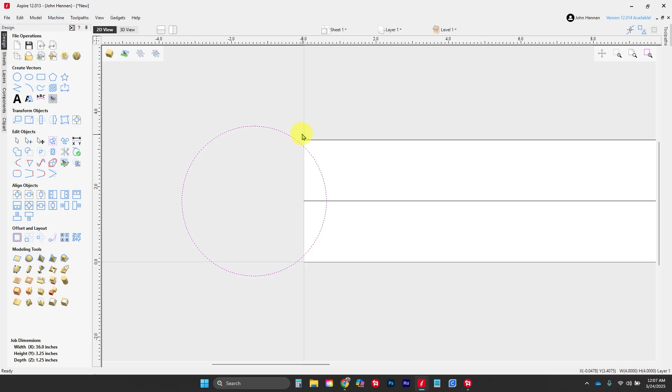It gives me a little extra room here for my reeds, and I'll show you where that's going to come into play. Second thing we do is just trim it off. So I'm going to use a polyline and grab my scissors tool and cut that off. Now I can delete my polyline. Grabbing this arc here, I'm going to go ahead and center it, and then using the 9 button on my keyboard, I'm going to rotate it flat and then just move it up here above.

The next thing I have to decide is the reeds, and what I like to do here is use the tool called Copy Along Vectors, and I'm going to set a 3/8 inch diameter circle with a distance between copies of 3/8 of an inch as well. And I am going to force even spacing. This is going to make sure they have a nice, clean, even set of arcs. So let's go ahead and copy that.

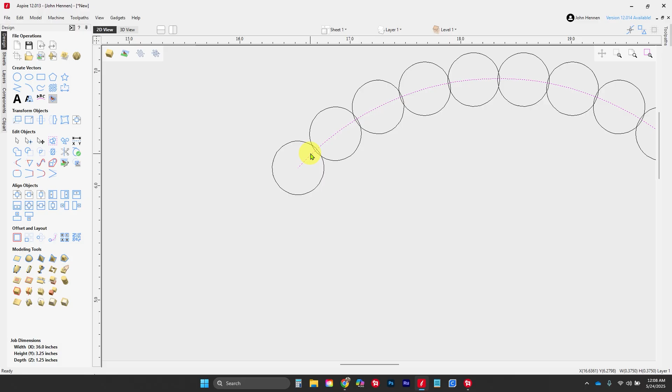And we're going to notice in here that we're just slightly overlapped, and that is a good thing. I'm going to show you why as we move this up and out of the way, again, just using the arrow keys on our keyboard. Let's move that up here, out of the way, and let's draw a polyline from the center of this circle right here, all the way over across this one here.

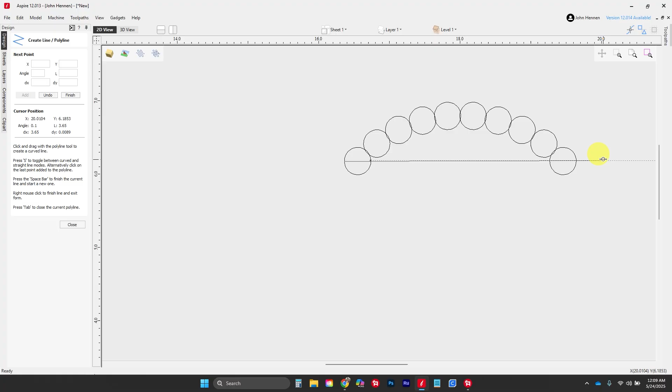And I want to make sure that my A stays at exactly 0 there. I don't want it to come up. Notice here it climbed, so let's delete that one off, and let's do that one again. Snap to the center, and come over here at an A0. Don't care how long it goes because that's all going away anyway.

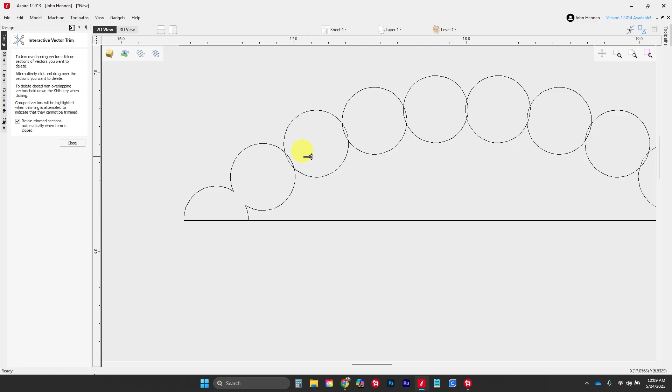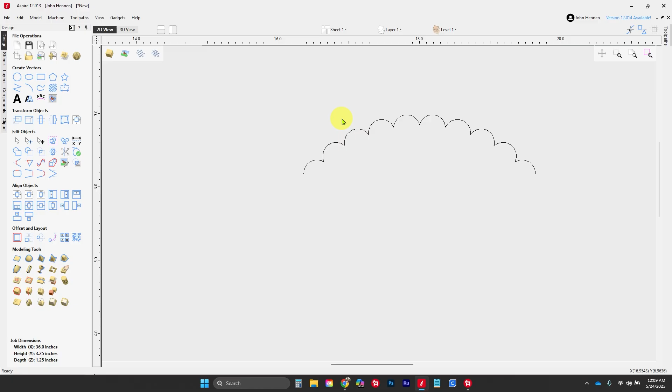We're going to take our scissors, cut out the center section, cut out the bottom of our circle here, and let's just separate the top from the bottom. Scissors tool is one of my favorite tools in Aspire. Really makes trimming everything nice and easy. Now we'll take this one over in node mode and delete this bottom section here, and also delete the bottom of our arc. Now here is our reeded surface, so let's go ahead and take a look at that and see what it looks like when we make it.

So we're going to use our vertical split screen that's up here. It's going to allow us to see the 2D and the 3D. We're going to select our center line. We're going to use the extrude tool. Now this tool is a great tool. We're just going to center the shape over the top of that line. Click on that there, and we're just going to hit apply.

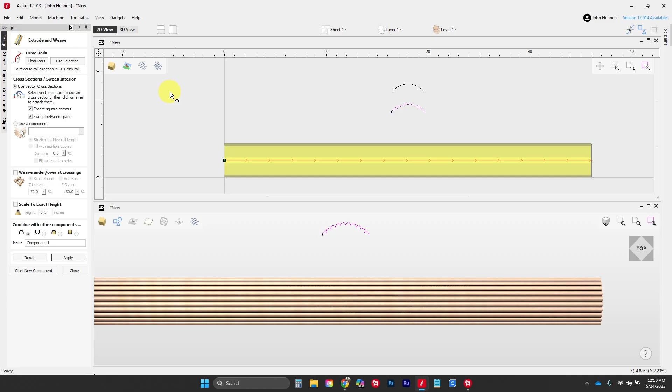Notice here it goes all the way out to the end. That's why we left that extra space there. Let's look at the end of our part here. It looks beautiful. We have a phenomenal set of reeds coming up here. Just exactly what we're looking for. So love it. I'm going to change that to a merge.

Hit close. And then I'm going to go ahead and just turn that off for a moment, because now comes the exciting part. We have to figure out how to build the ribbons. So let's go back to our Handbook of Ornament and look at these. Now the lower ribbon, or the underneath ribbon, goes from the upper left to the bottom right. And the ribbon that is on top goes from the lower left to the upper right.

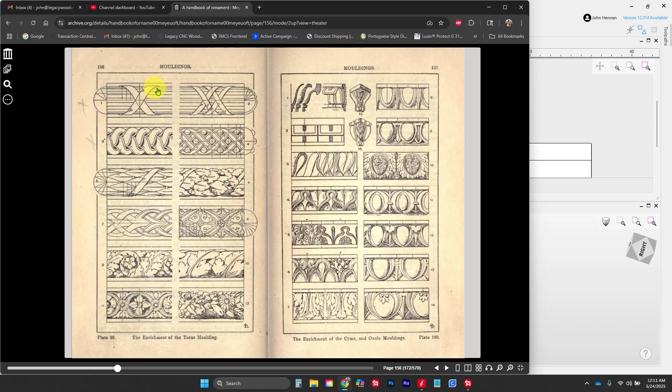Let's go ahead and just lay that out. We're going to first put in some parameters for it. We're just going to draw a rectangle and make sure that we just draw the exact height, and wherever it sits doesn't matter, because we're going to use our centering tool to put it dead center. All right, let's go ahead and just show our 2D view for a moment.

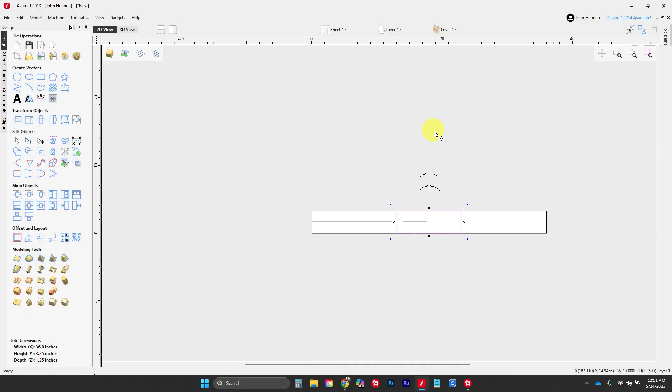And we're going to draw now a line that's going to come down at a 45-degree angle. So we're at 45. Go ahead and center that. And to make this thing just right, I'm going to use my offset tool. And I'm going to go both directions, 1/4 inch, and I'm going to delete my center vector. So now we're going to have a ribbon that is 1/2 inch wide.

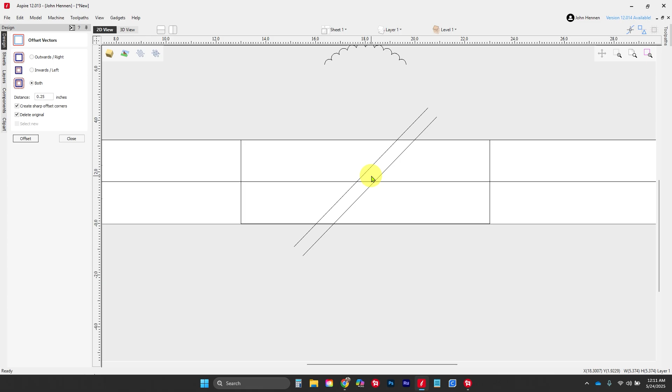I'm going to use my scissors tool one more time because it is my favorite tool. And we're just going to clean off all the excess here, just building ourselves a really cool parallelogram. From here, we're going to go to our node mode, and I'm going to hit B to Bezier, both of those. Now the trick is just to grab these upper 2 arms here. We're going to count as we move it. Use my arrow keys again.

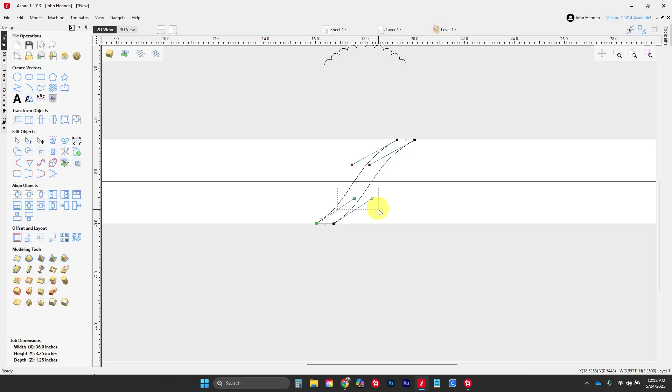Okay, and I'm going to grab the lower 2, going the opposite direction. And we start to have the shape that we're looking for. I'm going to go a little bit more than that one. And the same the other direction. Now we're starting to look great. One thing I do notice is up here is a little thinner than down here.

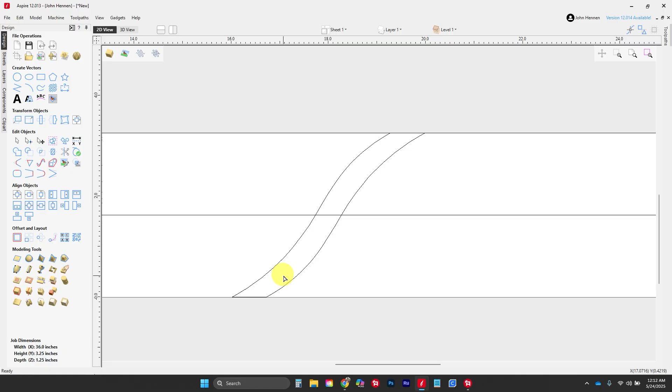So I'm going to right click and go to insert midpoint and right click and insert midpoint. And I'm going to go 3 in, 1, 2, 3, and 3 in, 1, 2, 3. Now what I have is a ribbon that's more of the same size for the entire piece. Really excited. I like the shape of this one, so that's going to be the shape of our ribbon.

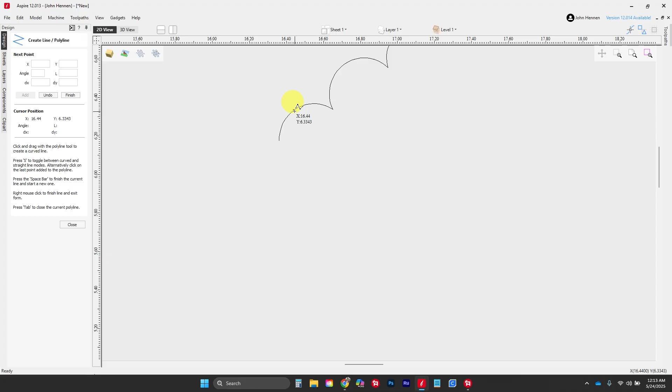The second thing we have to do is lay out the height of our ribbon, or the 3D portion of the ribbon. We want it to lay on the same curvature as the reeds, but we want it to be above the reeds. So to get the same curvature, the first thing that we do is we're going to draw ourselves a polyline, and we're going to just snap at the center of that circle here, and we're going to snap at this one as well.

And now what we'll do is we'll go to our node mode, turn that into an arc, and I'm going to pull this up until it's laying right on top of our reeds right there. Okay. Now that's where it would normally stay. However, it is above the reeds, not on the reeds. And so we're going to move it up. And all I'm going to move it is 1/16 inch.

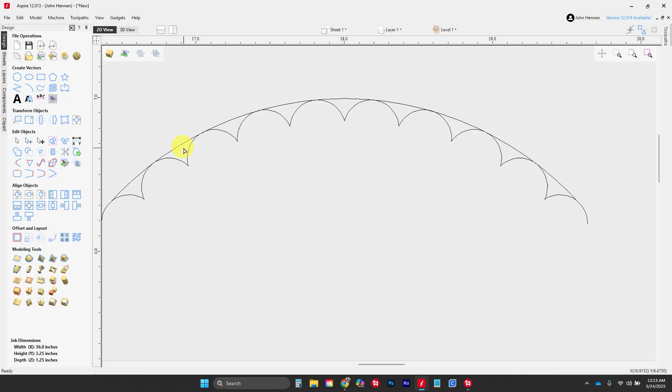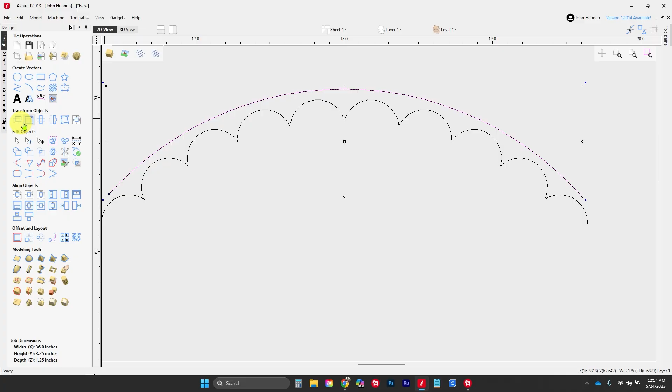So I'm going to grab that right there. And I'm just going to say move. And go relative distance in the Y of 0.0625 or 1/16 inch. So my first ribbon is going to lay at that height there. Now I'm going to copy and paste that one, and I'm going to make my second ribbon, or my higher of the 2 ribbons. I'm just going to move it an additional 1/16 inch.

There's that one. Okay. Now we need to draw ourselves a couple of lines here. I need a line that comes straight up first on both sides of this one.

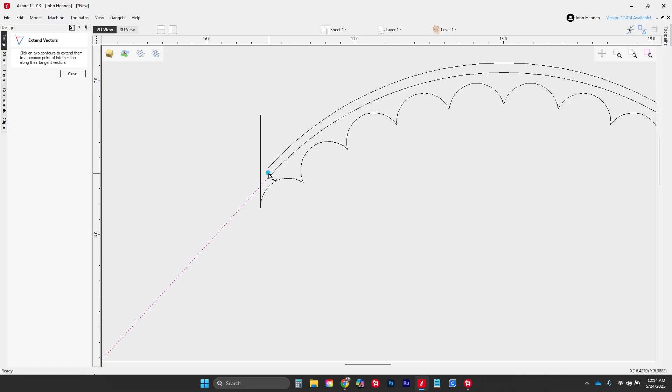Then we're going to use our extend tool. It's this guy right here. We're just going to extend this one out to there, extend this one out to there, and do the same thing here. With both of those extends done, I'm going to take this line, shift, grab this one, I'm going to copy it, paste it, hold down shift one more time, I'm going to grab the upper arc, and I'm just going to move it up and out of the way.

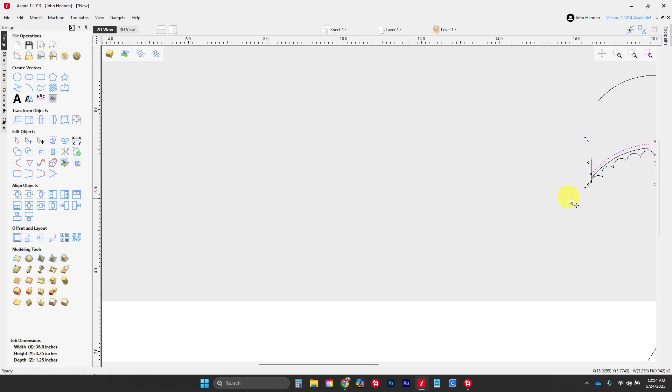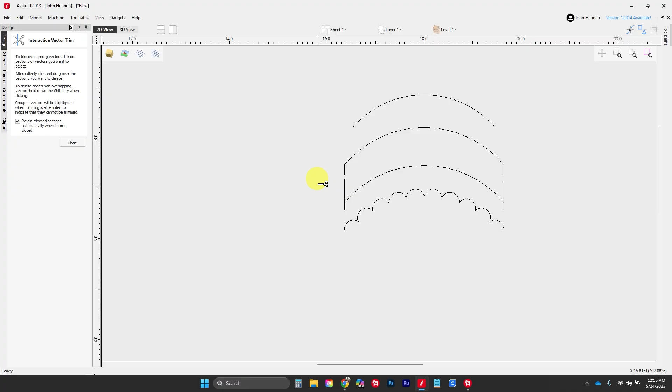Using my scissors tool, I'm going to just blend these all together. Snipping, snipping. For my next one, do the same thing. Grab these 3 pieces, move it up, and grab my scissors tool again. Making sure, of course, those vectors don't overlap as I'm trying to trim them off. Okay, so there's our reeds, here's our lower ribbon, and here's our upper ribbon. Let's go ahead and lay all that out.

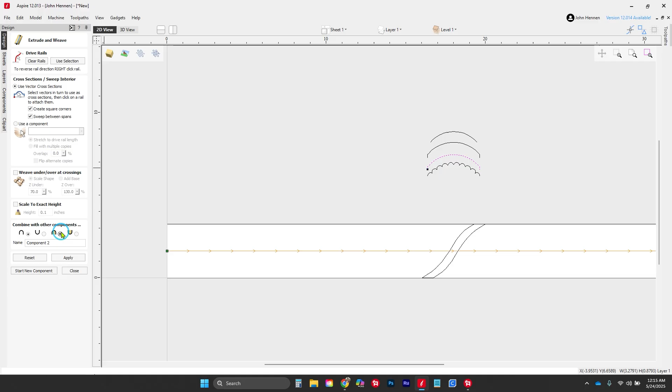So we're going to go back to our extrude tool. We're going to say use selection again once we select this line. And we're going to start with our lower ribbon. And we're going to set that to merge and just hit apply. We'll click on close. And we'll go back to our Handbook of Ornament real quickly to make sure that our lower one is the right one, that our higher one is the right one.

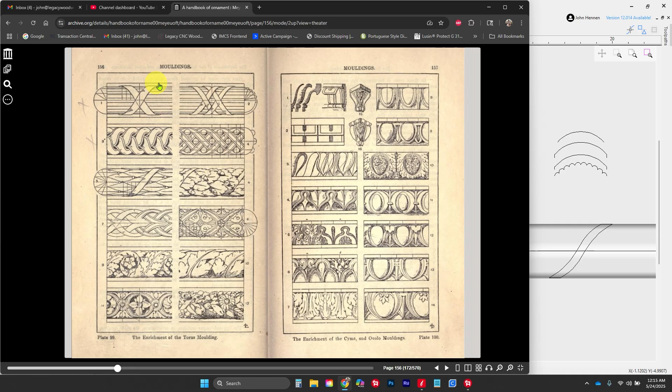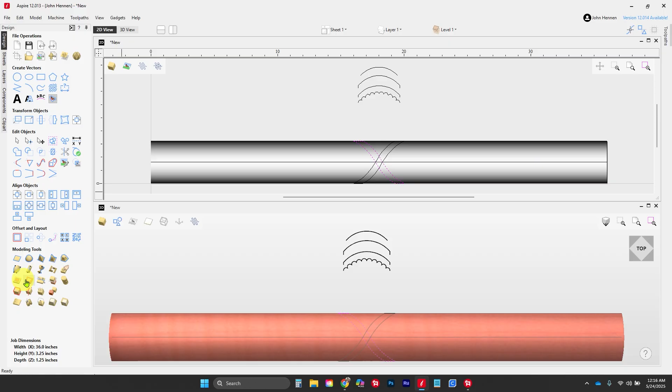So for our lower one, we need to take this guy here. We're going to copy and paste it and then hit V to vertical flip it, because our lower one goes from the upper left to the lower right. Holding down shift, we're going to grab our model. Let's go to our split view again. Let's just show you what happens when we click on this button here. We get one piece of ribbon. Now let's go ahead and do the other one.

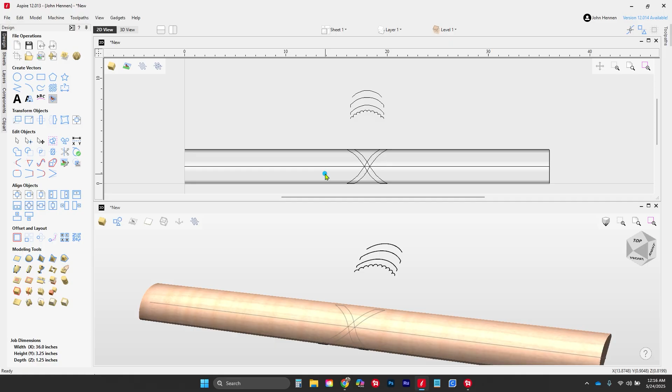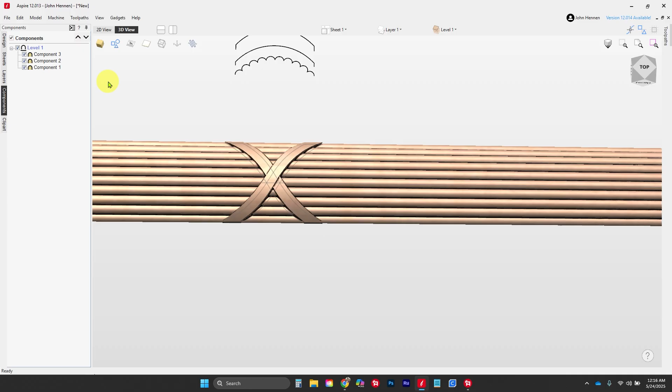Hold down shift, back to our extrude tool, use selection, have our secondary one here, our higher one, put on a merge, hit apply. There we are. And this time we need the one that goes from lower left to upper right. And let's go ahead and clear everything out of that. And now what we have here, if we look at our 3D view, we have these beautiful ribbons that are set above and below each other, just like it was wrapped up. Go ahead and turn on our original reeds. There they are. And you can see that we have our first pattern here.

Now the next thing we need to do is kind of tricky. We're going to grab component 2 and 3, and we're going to come over here to our array tool. And what we want to look at first is over here, we have it 3.986, or essentially 4 inches. So I want a gap between them of 4 inches. And we know this is 36. We're going every 4 inches, so I think I can get probably 5 copies here. Go ahead and click on copy. They're going to come off the page, and that's okay for a moment.

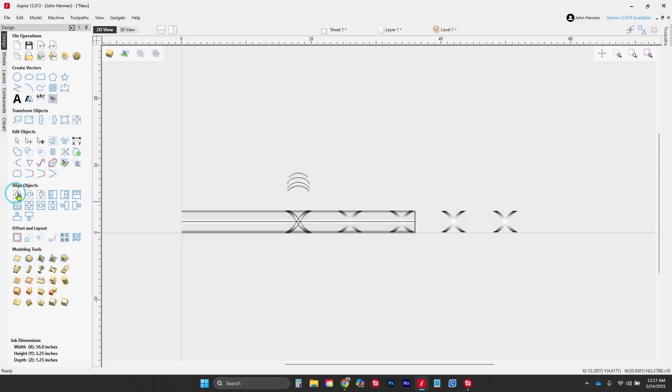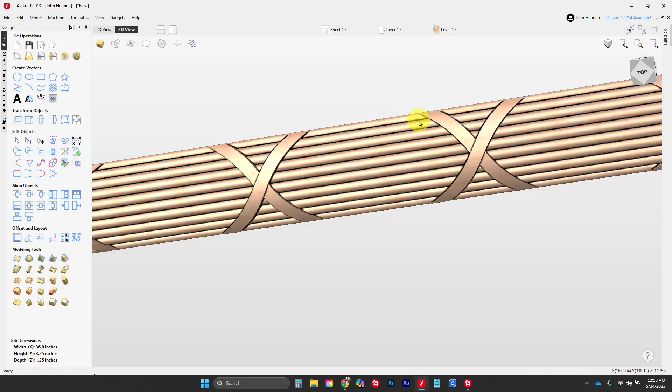We're just going to use our centering tool one more time, and let's take a look at what we just created. So here is our column. We've got a reeded column with our ribbons that are crisscrossing each other every 4 inches. And again, what we're looking for is approximately the same distance from that tip to that tip as there is from that tip to that tip. Again, 3.98 versus 4, it's going to be close enough. I like those whole numbers, they just make everything look a little easier.